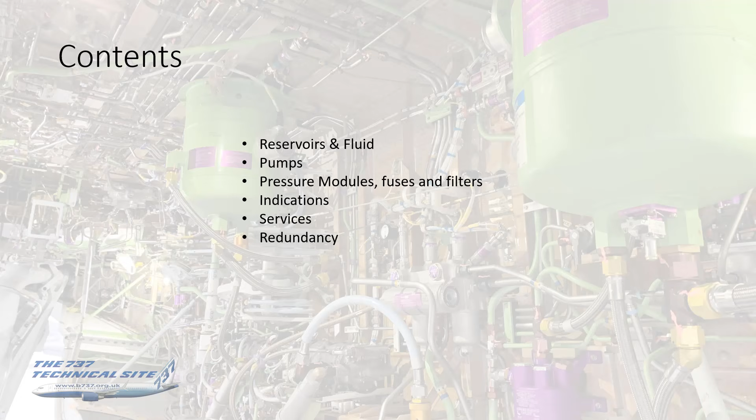In this we'll be covering the reservoirs and their pressurization, the fluid, the pumps, pressure modules, fuses and filters, indications, the services supplied, and redundancy.

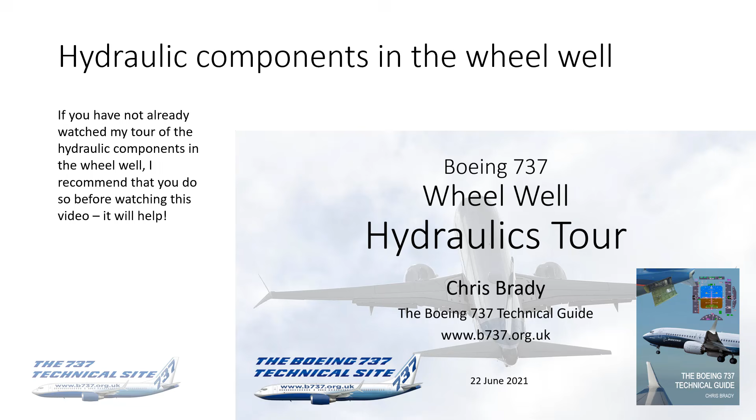A quick word about my previous presentation, the wheel well hydraulics tour. If you haven't already watched this one, I recommend that you do before watching this video. It will help. It's only about a 10-minute video, and it hopefully puts some of the components into context for you, where they are in the wheel well and how they interconnect. I'll be going through all of those components in more detail in this presentation, but think of the hydraulics tour video as a kind of intro or scene setter for the hydraulics visible in the wheel well.

Okay, if you're still with me, one thing I should have mentioned in that wheel well hydraulics tour, but didn't, is that all the hydraulic pipes have got this blue and yellow identification tag. You can see it on the pipe at the front, but there are two behind in shot as well, just out of focus. Now all the pipes will have that. It will help you if you wish to go into the wheel well and see some of these things that I'm mentioning. You can follow the systems through yourself.

Many, but not all of the pipes also have a named label to the right of the identification. So this one in shot here shows B system pressure with a flow arrow to the left of picture. They don't all have that named arrow, but a lot do. So you can go to a random hydraulic pipe, find its label, and it will tell you hopefully what service it supplies, which helps you build up a mental model of where everything is and how it all fits together.

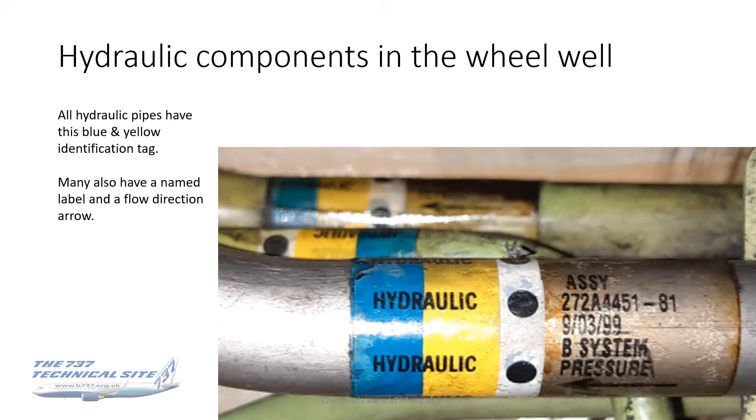Okay, so on with the presentation. Here we have the almost obligatory schematic for a complex system. This is the schematic that I use for hydraulics. You've got one in your FCOMs. The engineers have got several in their maintenance manuals, and they all look different. They're all laid out differently, but of course the functionality of them all is hopefully identical. You just use whichever one you feel comfortable with, either mine or the FCOM one or any others you can see issued by third parties. They all should be the same. It's whichever one sits right with yourself.

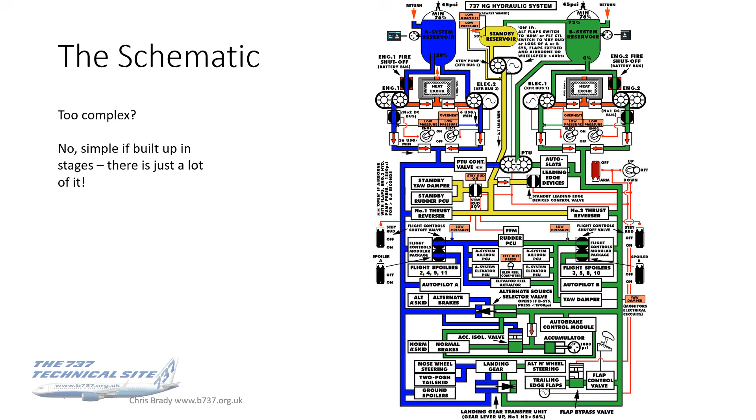The obvious thing to say about this schematic, like probably all of them, is that at first sight it looks very complicated. I can assure you it isn't. It's just that there's a heck of a lot in it, that's all it is. Like all schematics, when you break them down into their individual components, they're actually quite straightforward, and that's what I'll be doing in this presentation, taking you through it step by step so that you can build it up and understand how the hydraulic system fits together.

All right, on with the show. We'll start at the beginning with the reservoirs. There are two main hydraulic reservoirs, A and B, and these are pressurized to around about 47 psi from the pneumatic system. The reason for that is to prevent foaming of the fluid and also ensure that a positive flow of fluid reaches the pumps.

Now, this foaming phenomenon, for those of you that haven't seen it or heard of it before, happens in all liquids when you reduce the pressure, particularly if you reduce the pressure quite quickly. The demo I usually give to guys who aren't familiar with this: if you have a bottle of still water that you might drink in flight, on the ground, make sure the lid's screwed on nice and tightly. You take off, you climb, you get to top of climb, pull out the bottle of water, and open the lid. You will see in that bottle of water lots of little air bubbles form.

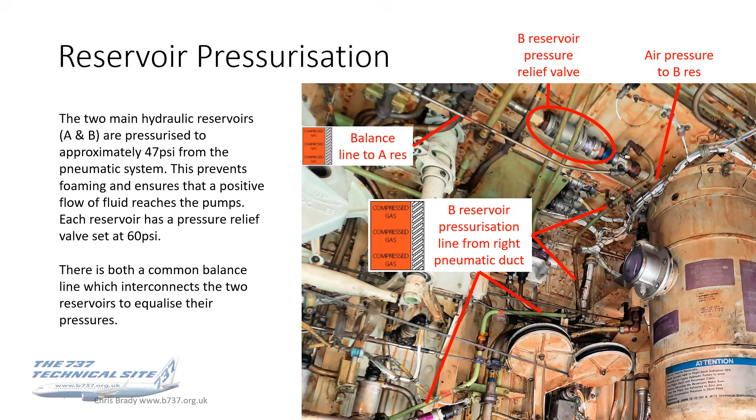There is a vent line that I've already mentioned, from the pressure relief valves between both reservoirs. This takes any overpressure fluid residue across the wheel well ceiling, then down into a drain mast located behind the wheel well. This also prevents fluid backflow into the pneumatic system.

The vent line going across the ceiling of the wheel well is quite easy to spot, because it's a thick pipe, and it's the only diagonal running pipe across there. If you're unsure of this, again refer back to the wheel well video I did.

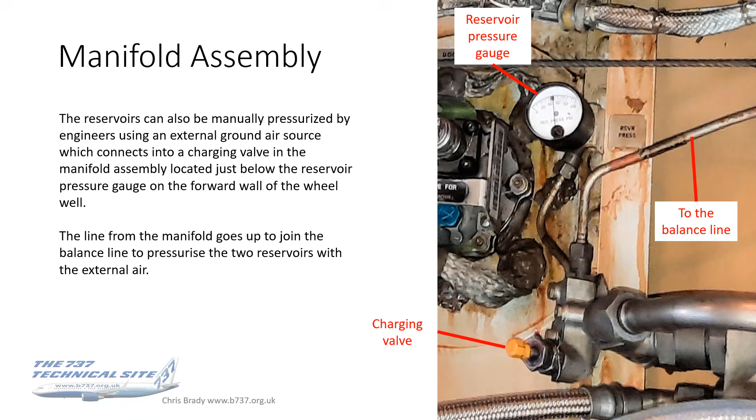Alright, so this is now just a short video of the 737 NG wheel well, showing the reservoir pressurization lines. I include this because the wheel well hydraulic tour I did was actually filmed on a Classic, and these components are different. It's actually the only real difference between the Classics and the NGs hydraulically.

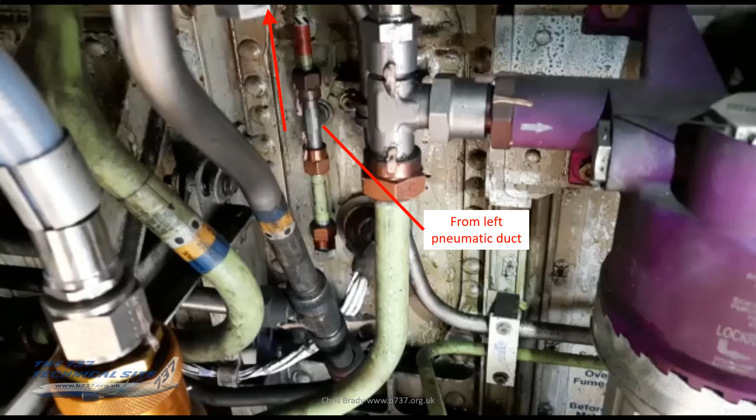It shows the A system reservoir pressurization run from the pneumatic manifold to the reservoir, across the balance line, and then down to the charging valve.

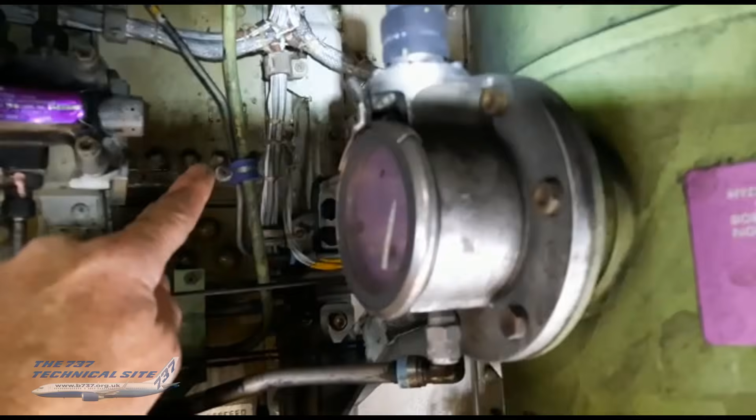On the Classics, where the manifold assembly is on the NG and the Max, they've got this unit called the reservoir pressurization module - so you won't see this on an NG or a Max. This takes the pneumatic sources, left, right duct or external, into a pressurization module, then separates the air for the A and B reservoirs.

That air then goes through two depressurization valves, which are sat on top of the module. They're labelled, and then onto the reservoirs. There's no balance line on the Classics because this unit effectively does the same as what the balance line would.

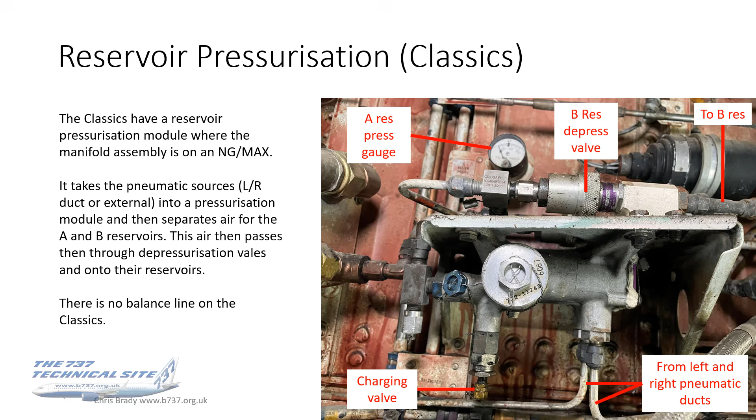Now, if you look in the wheel well, you may see either one or two reservoir pressurization gauges, and that tells you whether the hydraulic reservoir pressurization system has been modified or not.

From 2003, there was a modification available which fixed two problems. The first one was hydraulic vapors getting into the flight deck, caused by hydraulic fluid leaking up the reservoir pressurization line back to the manifold, giving hydraulic fumes in the air conditioning.

The second one was getting a hydraulic pump low pressure light during very long flights in a cold soaked aircraft. This was caused by water vapor condensing in the reservoir pressurization line, which would then freeze during a long flight due to the cold soaking and block the reservoir bleed air supply.

So if you haven't got a reservoir bleed air supply, as we've just seen, you'll get foaming, you won't get the header pressure to the pumps, and you could, in extremis, lose hydraulic pressure. So that's why the mod was done.

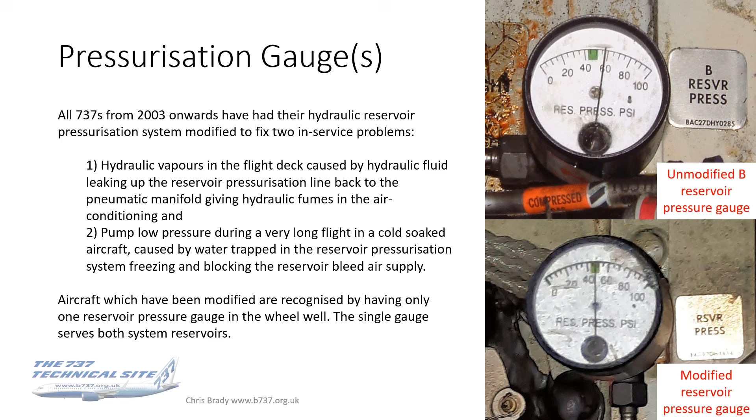Onto the reservoir itself. This particular one is the A system reservoir, and this photo was actually taken on a Max, so it's got the nice shiny new green reservoir there.

Working from the top to the bottom, the green pipe running across is your vent line to the drain mast, the one that runs diagonally across the ceiling of the wheel well. Below that, we've got the balance line going across to the B reservoir, and below that in green you've got the pressurization line coming up from the left pneumatic manifold.

On the side of the reservoir, you've got the quantity gauge and a transmitter which goes to us in the flight deck, giving us our hydraulic quantity. The reservoir itself, 21.6 liters is the full level.

The actual capacity of it is slightly greater than that because obviously it's not entirely filled with fluid, so you've got the air pressure at the top. It's 2/3 of the size of the B system reservoir.

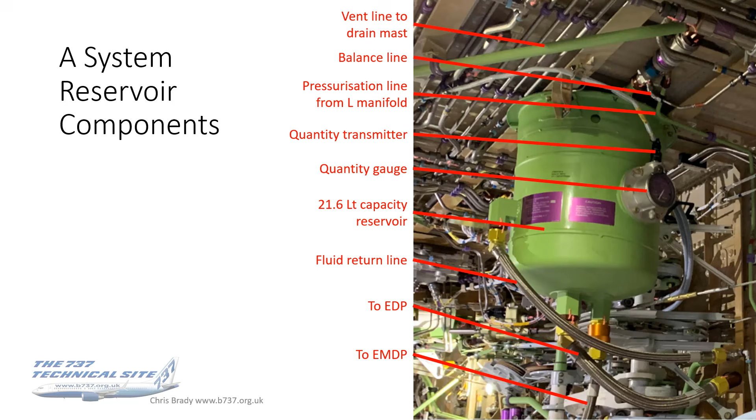Coming out to the bottom, you've got two pipes there, one to each pump, the engine pump and the electric pump, and above it, the silver braided pipe going into the side of the reservoir - that's your fluid return line. So that's where the fluid, after it's been round the aircraft services, comes back and is put back into the reservoir.

The B system reservoir is very similar. This one's in white, so it's an NG. At the top again, you've got the line from the right pneumatic manifold. You've got the reservoir pressurization and vent line just about visible above the reservoir itself.

Again, you've got the gauge and the transmitter. The first pipe going into the reservoir on the left-hand side, the upper one with the red elbow, that's refill fluid from the standby reservoir. The hydraulic fluid is actually replenished for the B system through the standby reservoir, and that's the interconnecting balance line between the two.

The B system's capacity is 31.1 liters, which is half as big again as the A system. The fluid return line is the next one down, with the gold coloured fitting at the top of it, and at the bottom, unlike the A system, you've got three pipes coming out of it, the extra one being for the PTU.

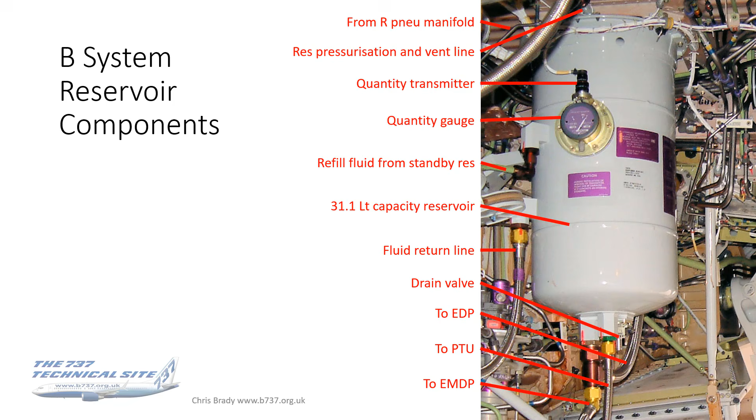On the originals, for anybody still flying them, and by originals I mean the 1 and 200 series, the B system reservoir was very small. It was actually just under 6 litres, so that's about a sixth of the size of the current B reservoir on the NG and the Max.

On the originals, the A system was used both for the flaps and the landing gear, so B was effectively just a backup hydraulic system for the other services. A was the one that was the major system.

The standby reservoir - this is a photo of the unit on the NG and the Max. Differences between the other ones is it's kept full, absolutely full of fluid, so it doesn't contain any air, so it doesn't need pneumatically pressurizing, which keeps the system quite simple.

The fluid is kept pressurized by a fluid filled balance line to the B system, which I mentioned in the previous slide. So going through the components on this, from top to bottom, you've got a low quantity switch on the very top that comes on at 50%.

The balance line is there from the top, but goes to the B reservoir. The capacity of this reservoir is just over 13 litres. The fluid is refilled on the line which goes into the center of it, on the right of the picture. Output of fluid is the large braided line down at the bottom, and fluid is returned along that thin green line which goes back in on the other side, which you can't see in this photo.

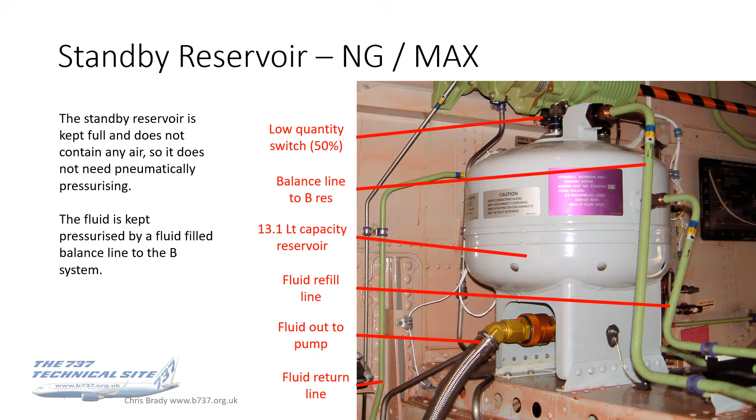But you can see it in this photo. This is a photo of the standby reservoir on the classics. All the components are the same as the NG and the Max. Just on this photo, you can see the fluid return line because it goes in at the back. The real difference between the classics and the NG, apart from the shape, is that the capacity is actually the same, to within a few mil.

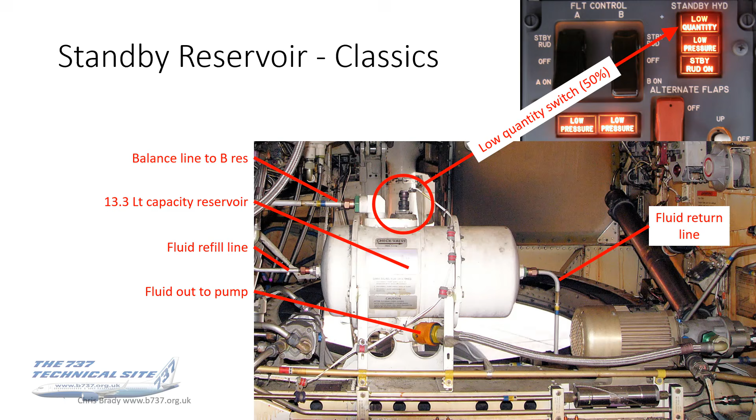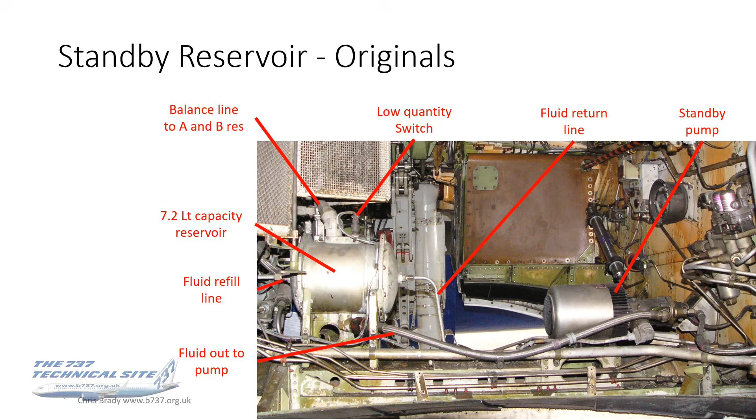The difference is the standby hydraulic pump is in the wheel well here on the classics, whereas on the NG and the Max it's moved out. On the originals, the standby reservoir is smaller again at 7.2 litres, so it's around about half the capacity of the reservoirs on the classics onwards. But again, all the components there are absolutely the same as they are even on the Max today.

Servicing of the reservoirs.

The hydraulic fluid is replenished with this sort of wand and hand pump arrangement, which you can see in the right hand wheel well. If you just look over the lip of where the wheel goes, you'll see it down there. The hand pump's that white handle that's bracketed into the full bulkhead. If you look above that, you'll see a 3-position switch, or selector switch, for either A, B, or closed. Remembering that B actually replenishes the standby reservoir and then sends the fluid onto the B reservoir.

For those that are interested, the official specification of the hydraulic fluid is a fire-resistant version known as BMS 3-11 Type 4. Common brand name for this is Skydrol, and that's usually what it's referred to as. Other brands are available, and this stuff isn't cheap. I googled it just before I did this presentation just to get an idea of price, and it's about $1,000 for a case of 24 quarts. So not cheap stuff.

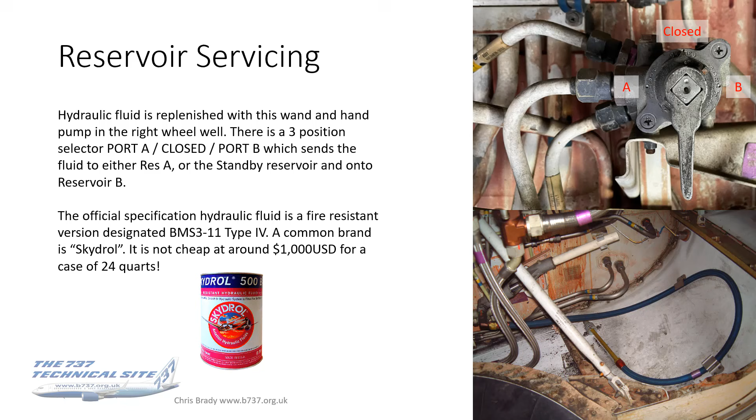Alright, so inside the reservoirs you've got standpipes. Now this data is only applicable for the NG and the Max. On the classics, the standpipes are a slightly different height and arrangement, so this information is just for the NG and the Max. The A system's got a standpipe on the engine-driven pump line.

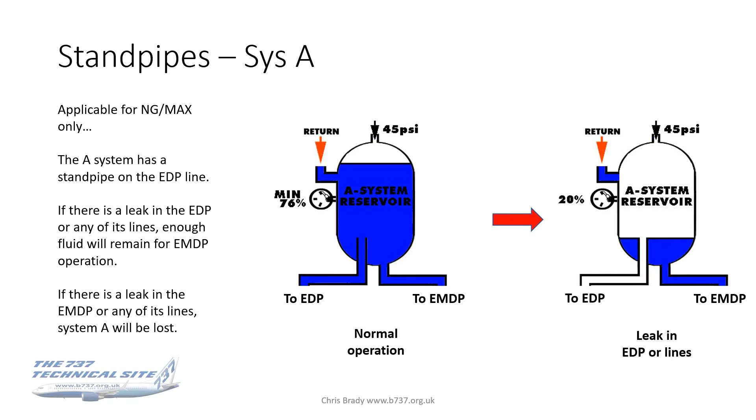If you get a leak in that engine-driven pump or any of its lines, the fluid will drain away, but only to the level of that EDP standpipe. So that will leave enough fluid for continued operation of the electric pump. Now, if there's a leak in the electric pump or any of its lines, then you just lose a system's fluid. There's no reason for a second standpipe at all.

The B system, and again this is only applicable for the NG and the Max, has got a much shorter standpipe because it only needs to be shorter, because the only system this could feed in the event of a leak would be the PTU. That's because the engine-driven pump and the electric pump are on the same feed from the reservoir. So if there's a leak in either the engine or electric-driven pumps or any of their lines, the quantity will disappear away to indicate 0. Now, although it's indicating 0, there is enough fluid for PTU operation.

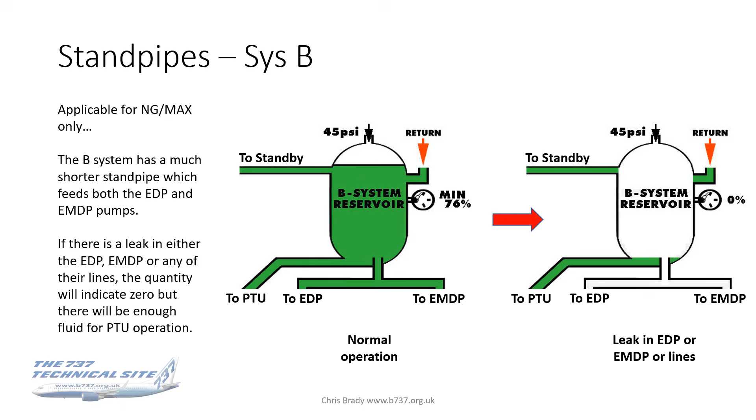So it's not really 0, but that's the indications we get in the flight deck. The standby system, and this is applicable for all generations of 737, the standby reservoir doesn't have a standpipe. If there's any leak in the standby pump or any of its lines, the standby system will be lost. Now, the manuals say that although the standby reservoir is connected to the B system reservoir, a leak in the B system will not affect operation of the standby system, which is comforting to know. And just a reminder, the low quantity light, which is on the flight controls panel, that will illuminate at 50%.

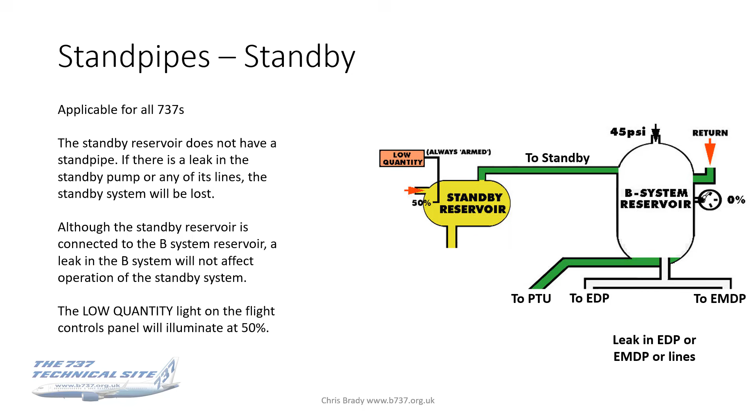So to summarize all of that: on the A system, there are separate standpipes for the engine pump and electric pump. A leak in the engine-driven pump or any of its lines will leave enough for the electric pump operation. For the standby system, a leak in the B will not affect operation of the standby system. And on the B reservoir, you've got a direct feed to the PTU. There's a combined standpipe for the engine and electric pumps, which is a difference from the classics, but it's still enough for PTU operation.

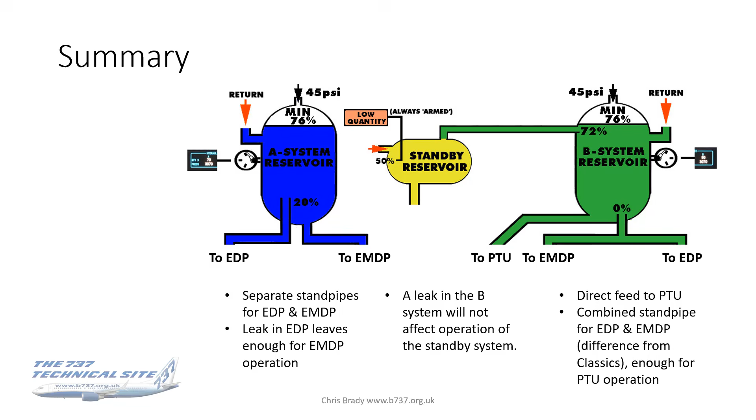How you'd use this, I guess, is if you're in a 737 NG and you notice the A system quantity dropped to 20%, then you can suspect a leak in the engine-driven pump or its lines. What you choose to do with that information is up to you, but it's all good background knowledge.

All right, that's enough of the reservoirs and the fluids. Let's go on to pumps now. I'll just start briefly with the originals.

I realize there are very few people watching this who fly them, but just for a kind of historical perspective, and to help show you the derivation of where we got the present arrangement today. The originals had System A, which remember was the primary system, powered by the two engine-driven pumps.

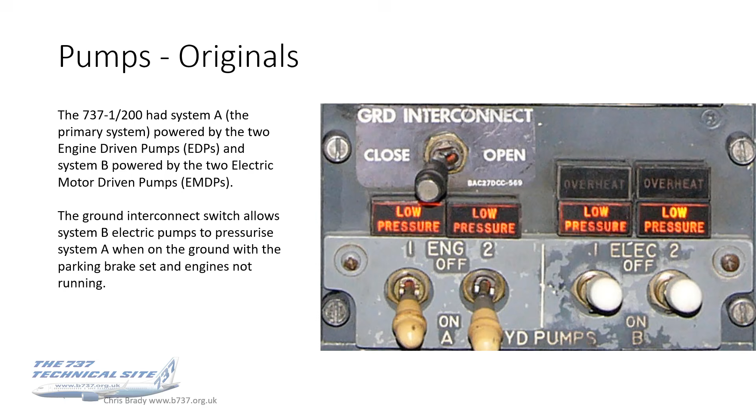Okay, so back into the present day. From the 737-300 onwards, each hydraulic system has got both an engine and an electric pump, powered from the opposite side, either gen bus on the classics or the transfer bus on the NG and the Max. This is for greater redundancy in the event of an engine or generator failure.

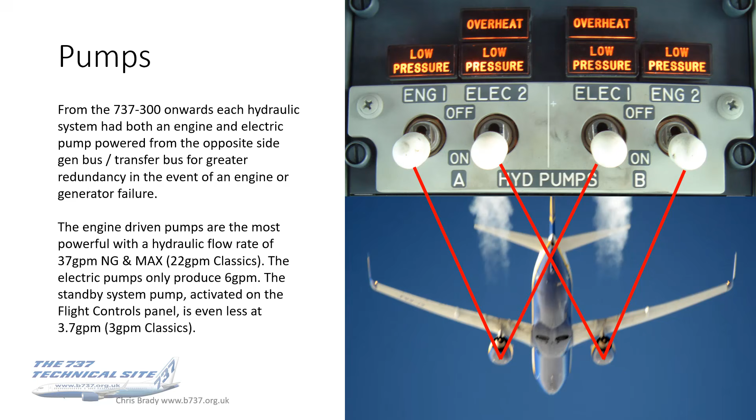The engine-driven pumps are by far and away the most powerful. They've got a hydraulic flow rate of 37 gallons per minute, or 22 gallons per minute on the classics, whereas the electric pumps only produce 6 gallons per minute. So the engine-driven pumps are 6 times more powerful. The standby pump, activated from the flight controls panel, is even less at 3.7 gallons per minute, but then again, it has a lot less to do.

Now we know there's an on-off switch, but that is actually something of a misnomer. When you switch an engine-driven pump off, the pump actually remains running. What you're doing by moving the switch to off is energizing a solenoid operated blocking valve that blocks the pump output, so there's no output from the pump. The hydraulic fluid still flows around the pump case, but that's for cooling, because the thing's still turning. But you cannot physically switch this pump off, which you may need to bear in mind, and I'll come on to why later.

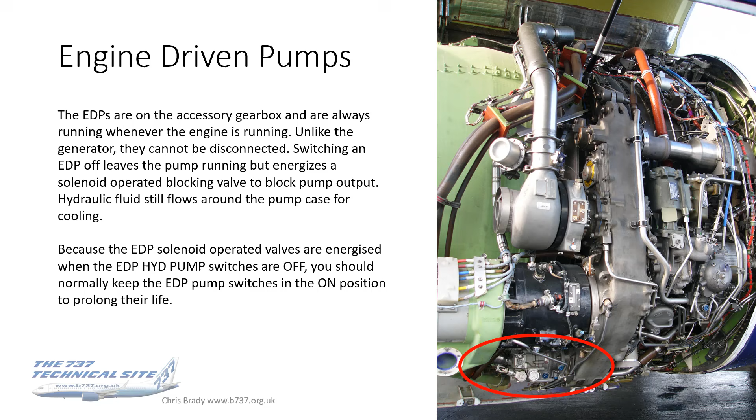So this is partly why it's important to pull a fire switch as directed by the QRH, of course, if you have engine damage.

Pulling the fire switch stops fluid flow out to that engine-driven pump. Remember, that pump cannot be switched off - it'll always keep turning, and if there's damage in there, it could be indefinitely leaking your hydraulic fluid out, which you might need for other services. So if you pull this fire switch as directed by the QRH, it will hopefully stop the hemorrhaging of fluid from the pump or the vicinity of the engine.

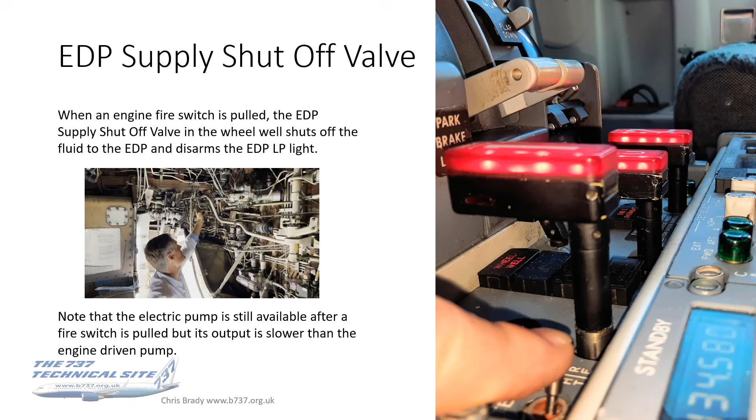When you do this, it's worth noting that the electric pump is still available after a fire switch is pulled, so you haven't necessarily lost the A or B system, depending which side it was that you pulled. But of course, the output is going to be much slower than the engine-driven pump.

Okay, let's look now at the electric motor driven pumps - these are located in the forward wall of the wheel well near the reservoirs. Next time you're on your walk around, you can go in and have a look at these. They're there on display for you.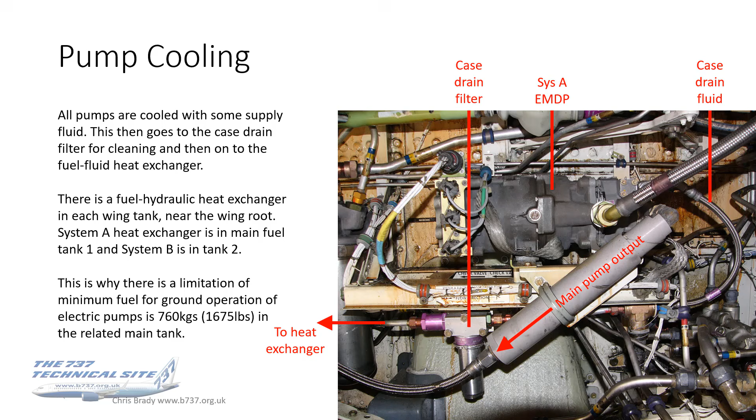There is a limitation of minimum fuel for ground operation of the electric pumps of 760 kilos in the related tank, and this heat exchanger is the reason for that limitation. It's only there for the electric pumps - it's not there for the engine-driven pumps, because they don't get as hot since they don't have the electric motor. The case drain fluid from the engine pumps does also go through the heat exchanger, but the limitation on minimum fuel isn't there.

So talking of heat, let's look at the pump overheat and where this comes about. If an overheat is detected in either the electric pump itself or the electric pump case drain fluid, the overheat light will illuminate, and the trigger temperature for that is around about 110 centigrade. Now this light will extinguish again if it cools below 85 C.

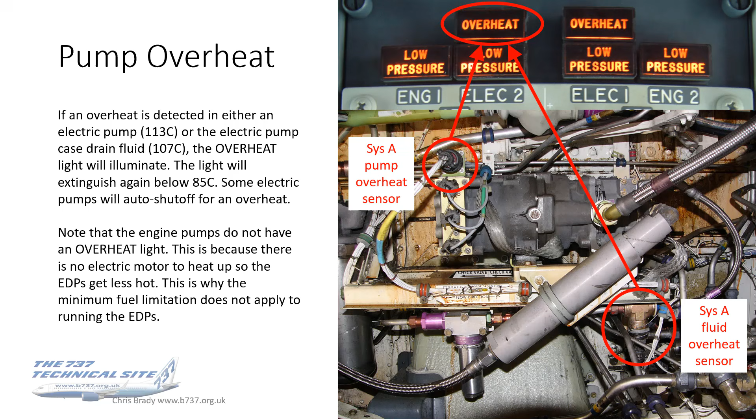Some electric pumps will auto shut off for an overheat, so check your FCOMs for which version you've got - most of them don't actually, most you have to go into the QRH and manually switch off the electric pumps. You can see on the photo the two pickup points for the overheat sensors there. Again, I make the point that the engine pumps don't have an overheat light - that's because there's no electric motor on them to heat up, so they get less hot. This is also why the minimum fuel limitation doesn't apply to running the engine-driven pumps.

Okay, for the standby pump, as we've already mentioned, on the originals and the classics it's there on the keel beam. Again, like the other pumps, it's cooled by case drain fluid, which is then filtered, but then returned directly to the reservoir, so it doesn't go through the heat exchanger. You can see level - the large part of this pump is actually the motor.

It's the motor that drives the pump. The pump is the small part on the right hand side. Supply fluid going in there on the braided line.

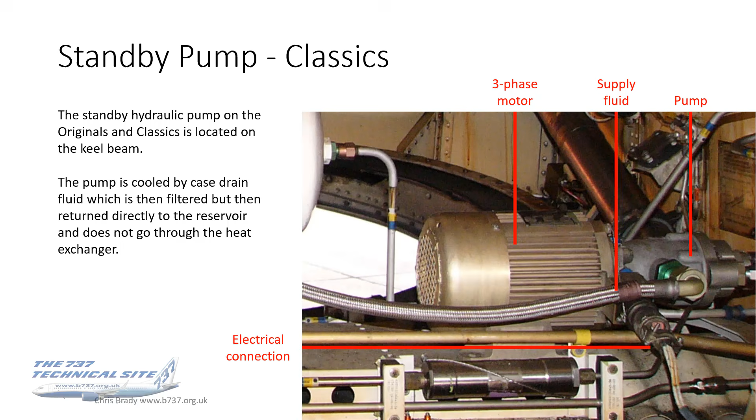On the NG and the Max, you won't find the standby hydraulic pump in the wheel well. It's been moved out onto the right aft wing body fairing behind the bulkhead. Also the brake accumulator has as well.

I've never had a straight answer why this was done. I suspect it was because the landing gear was lengthened for the NG, and as a result the space on the keel beam got a bit tight, so the pump moved. It could also be to stop any secondary damage from, say, a tyre burst affecting the standby system. I don't know. Either reason is valid. They had that empty space there in the wing body fairing, and in my opinion this is a big improvement to use it and put these critical components here.

The only difference between this pump and the pump that was on the keel beam in the classics is that red horn on the far end of it, and that's a cooling air duct, because obviously there's less airflow in here than there would be in the wheel well.

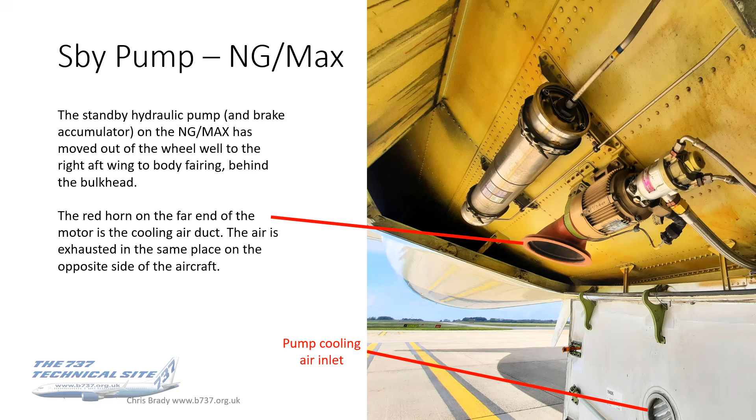So the air comes in through that air inlet on the door. You can just see that grill at the bottom into there, cools the motor, and then the air is exhausted in the same place on the opposite side of the aircraft. So on the left aft wing body fairing, you will see another sort of hole, and you may wonder what it's for. Well, now you know. It's the exhaust for this cooling.

All right, so standby pump control. Let's take a look at that. The standby hydraulic pump can be activated in a number of ways, but manually we can activate it by moving either of the flight control switches to the standby rudder position, or by moving the alternate flap switch to arm. So any of those three switches will start the standby hydraulic pump.

You can do this safely on the ground, as long as there's no wire locking on your alternate flap switch, and certainly on the classics you can hear the pump run. On the NGs and Max it's more difficult to hear it because it's further aft and outside of the aircraft.

The standby pump will also activate automatically through either the auto standby system, which I'll cover later, or the main rudder PCU force fight monitor, and I'll cover that on the flight controls videos.

When the pump is activated for the first time in a while, so several hours have passed since it's been activated, the low pressure light will illuminate for a second while the pump charges, and then that light will extinguish. So that's a little confidence check for you that the pump's actually running.

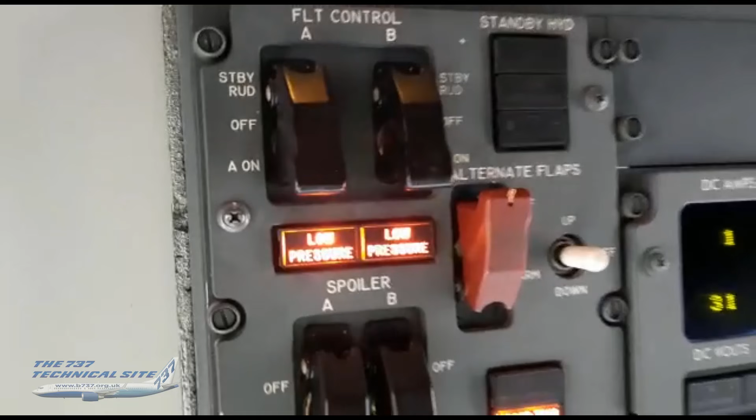Okay, so this is just a video demonstration of the alternate flap switch to arm and the flight control switch to standby rudder. I'm going to start with the alternate flap switch first. Just open the red guard, nothing happens.

Move the switch to arm. Notice the low pressure light illuminates. This is just for a fraction of a second. I've paused the video here so you can see it. That's the proof that the standby hydraulic pump is energized. So the motor's got electric power and the pump has just primed itself, and when it's primed that light will extinguish.

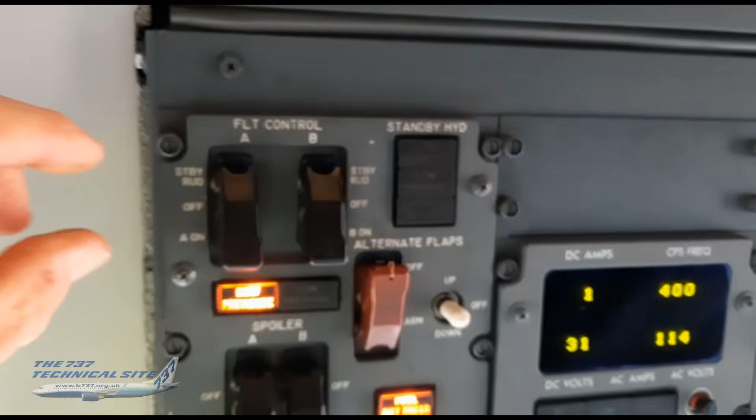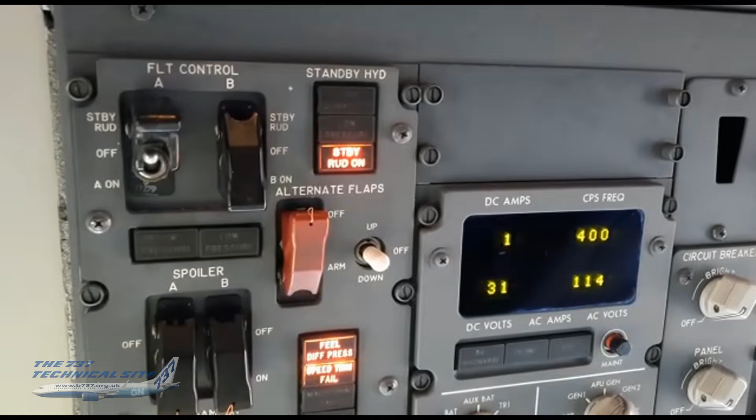So we can continue here and just close the guarded switch, go to the flight controls now, and I've got the A system off and the B system on. That's why the low pressure light's on the A system. Through to standby rudder, the light comes on, and the flight controls low pressure light goes off.

Switch it off and it's back to normal. With the B system, through to standby rudder, again low pressure light is off as you would expect, and the standby rudder light comes on.

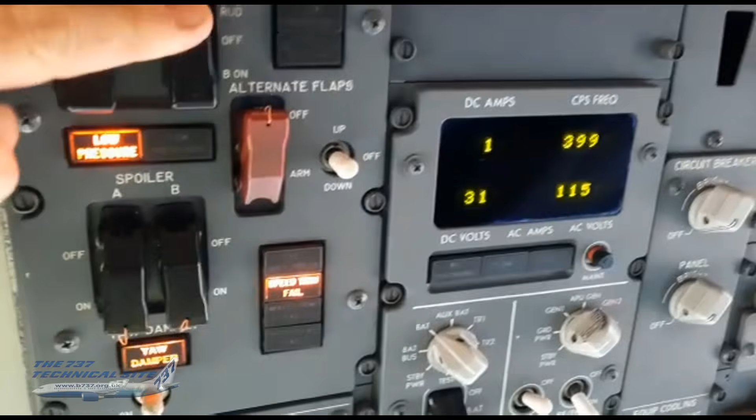That's it. So in summary, the engine-driven pump has got 6 times the output of the electric pump, so it's a much stronger pump. Pulling the fire switch will only shut off fluid to the engine-driven pump. The engine-driven pump cannot be switched off. And the electrical source for the electric pump is from the opposite side.

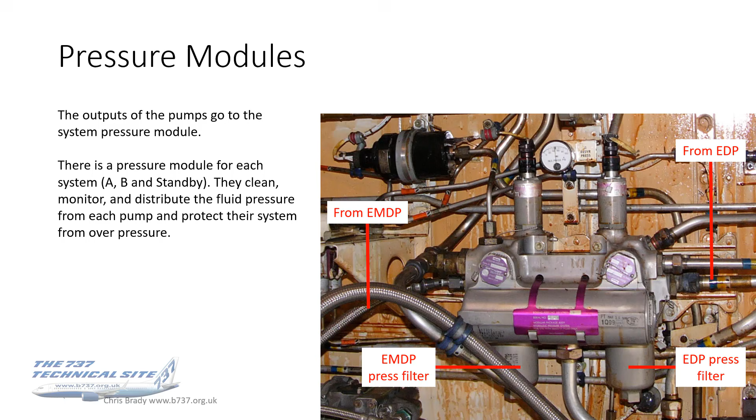You can see the pressure filters at the bottom, and up at the top is where the pressure is sensed from each pressure module, sent to us in the flight deck for triggers for low pressure warnings, or further up and to the left there, the actual pressure sender for the hydraulic pressure.

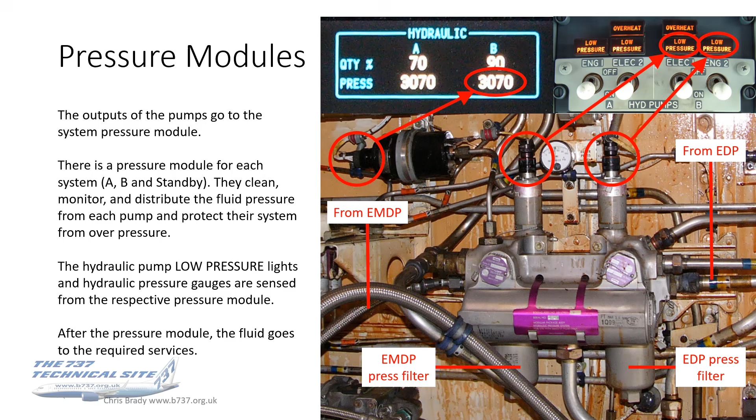After the pressure module, the fluid goes out to the required services, and you can see pipes coming out of the left and right hand side of this, which go off to the various services.

Now, on the way to the services, there are hydraulic fuses, and you can see these in the wheel well. If you're not familiar with the concept, we're probably all familiar with an electrical fuse - if there's too much current, the fuse burns out and stops the current flow. A hydraulic fuse does exactly the same thing.

So they're basically spring-loaded shuttle valves, and these will close the hydraulic line if they detect a sudden increase in flow, which you would get from a burst pipe or similar downstream. In closing, it preserves the hydraulic fluid for the rest of the services.

There are hydraulic fuses fitted to the brake system, shown here just because they're the easiest to see in photograph. The leading edge flaps and slats extend and retract lines have all got them. Nose gear extend and retract lines, and the thrust reverser pressure and return lines - all of those services have hydraulic fuses on them, so if there's any damage either to the component or a burst in the pipe, you don't lose the whole system pressure.

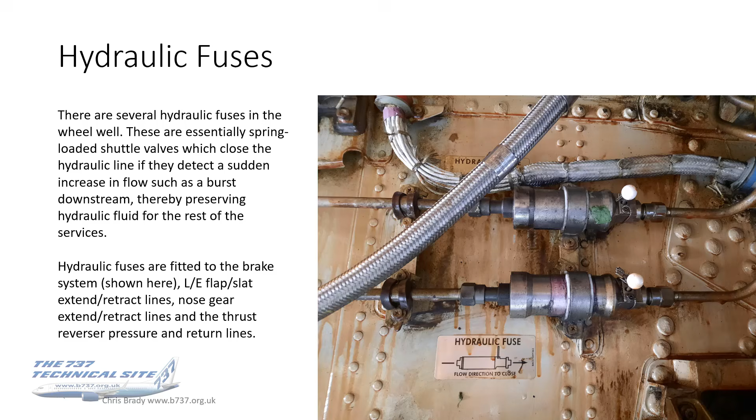When the hydraulic fluid returns from the services, or the heat exchanger, if it's case drain fluid, it goes through the return filter for cleaning before going back into the reservoir.

If the filter clogs, then a red differential pressure indicator will pop up, and you can see I've indicated where it is on the filter there. If the pressure differential goes above 65 psi, the indicator will pop up. If it increases further to 100 psi, then a bypass valve opens and the fluid is allowed to go directly back into the reservoir, on the basis that even contaminated fluid is better than none, at the cost of keeping your hydraulic system clean.

On the photograph, you can see I've labelled the various parts. The bulk of this is at the bottom, the filter housing, and there's a clip just above it, a wire locked clip, so you can change that filter. The wire lockings have become more and more intricate over the years, as a few of these have worn loose and been the source of loss of hydraulic fluid in flight.

The return flow goes in on the left, so that's where the fluid comes in from the services. It then passes around the outside of the case, is squeezed in through the filter, and then passes up through the middle and back out for return to the reservoir. The heat exchanger fluid actually goes into the top, but doesn't go through the filter, surprisingly, even though it joins the filter cap - it just goes straight to the reservoir.

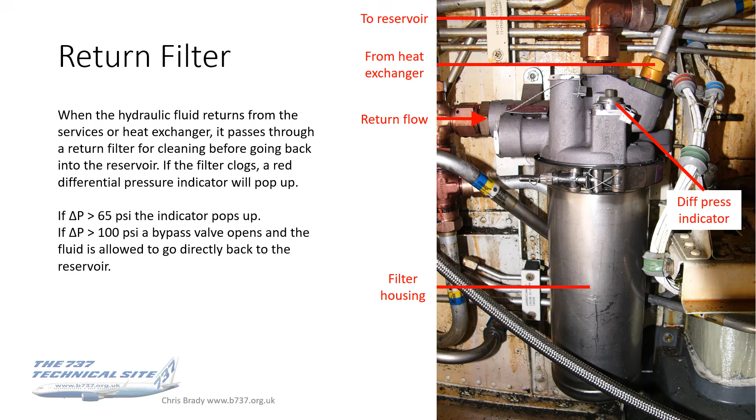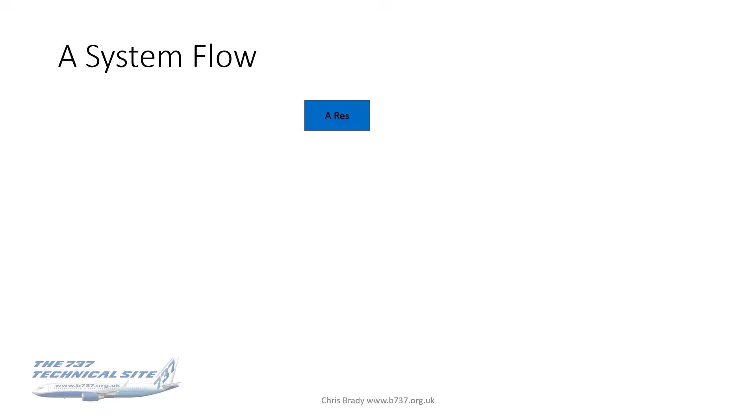Alright, so let's recap what we've done with all of those components and have a look at the flow, the hydraulic flow in the A system. It all starts with the reservoir, which is pressurized from the left pneumatic duct - the A system's from the left, the B is from the right pneumatic duct - and the reservoir can be refilled with hydraulic fluid.

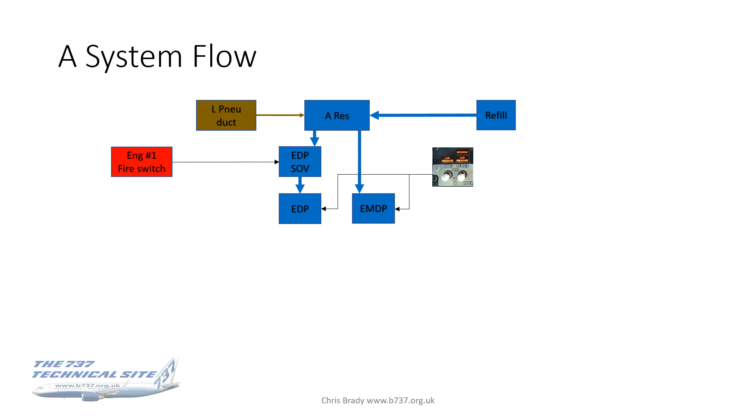From the reservoir there are two outputs, one to each pump. The engine driven pump has a shut-off valve in between, which is operated by the engine number 1 fire switch. From the pumps, which are operated on the hydraulic panel, their output goes to the pressure module. The pressure module gives us information about the hydraulic pressure and will also trigger the low pressure lights.

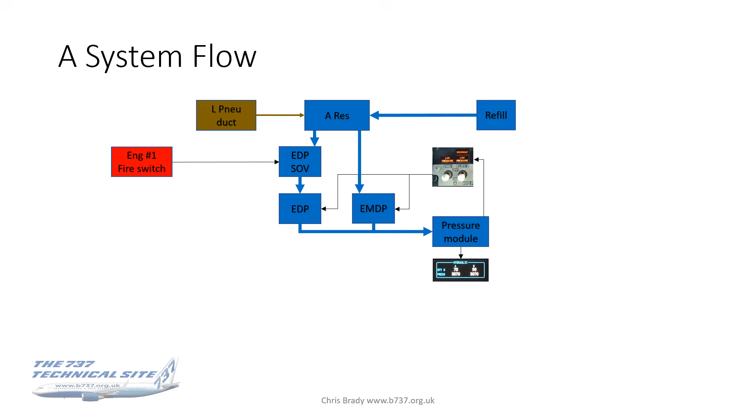From the pressure module it goes to the services, and that's a list of services from the A system. Obviously in the B system that list would be different. After the services, the fluid goes back to the return filter, which we've just been looking at, for filtration and cleaning, and then is returned back to the A system reservoir.

Now you recall that some of the fluid for the pumps is used for cooling. That goes away to the case drain filters - small filters that you can see in the wheel well, just below the electric pump. The electric one's got an overheat sensor, which will also trigger the overheat light. From the filters they go to the heat exchanger, in this case the number 1 main tank, and then back into the reservoir. So that's the flow of hydraulic fluid.

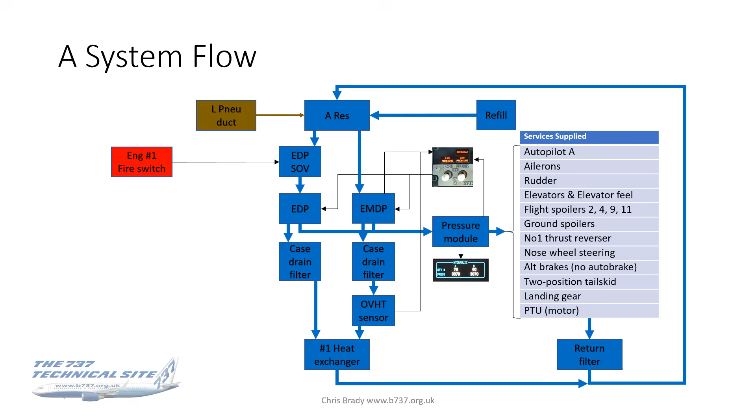The B system is very similar. The main difference is that it's got the PTU addition, so there's an extra pipe coming out of the bottom of the B reservoir, which goes to the PTU pump. The PTU pump is driven by a motor which is driven by the A system. The pump gives added pressure for the leading edge flaps and slats and auto slats.

That fluid is then returned to the case drain filter and overheat sensor for the electric pump. So if by any chance the PTU pump were to overheat, that would show itself as an overheat light on the B system pump. The only other difference is refills through the standby reservoir, and of course the services are a different list of services supplied.

Alright, so let's have a look at the indications that we get in the flight deck and how they've changed over the years. Going right back to the originals again, just for a historical record, to show you the derivation, and for those of us flying the NG or the Max, how lucky we are for having our nice ergonomic displays. In the originals there is only a quantity gauge for system A, and that's because A, if you recall, is the primary system.

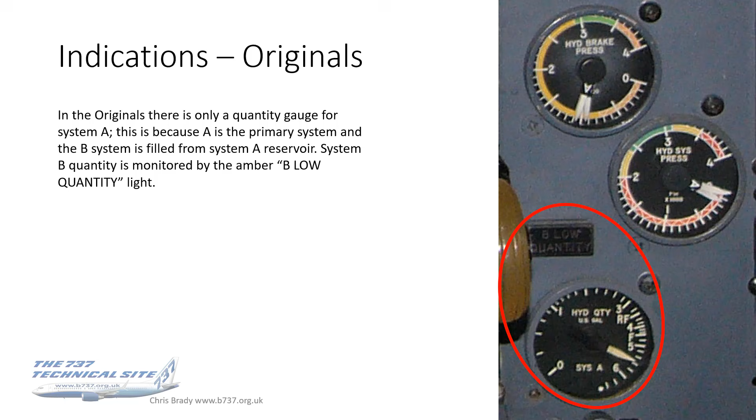The B system is filled from the A system reservoir, so system B quantity is monitored by an amber B low quantity light. The hydraulic system pressures are shown on one gauge with two needles, the A needle, as you can see, being at the front. And the hydraulic brake pressure gauge has also got two needles.

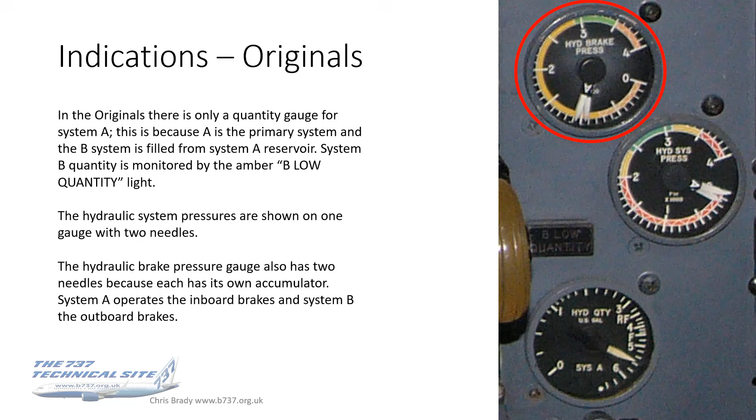That's because on the originals, if you remember back to the landing gear module that I did, it's got two accumulators. System A does the inboard brakes and System B does the outboard brakes.

Fast forwarding slightly to the early classics - these are the pre-EIS ones, built between 84 and 88. The B system on the classics now operates the trailing edge flaps. On the originals, the A system did both the flaps and the landing gear, but they've balanced the loads out now on the classics, and the B does the flaps. So by way of promotion, it's now got its own quantity gauge, and the markings are a lot more simplified than they were on the originals.

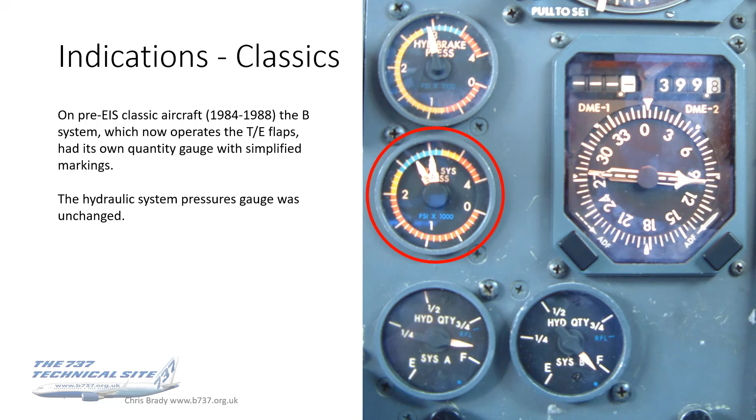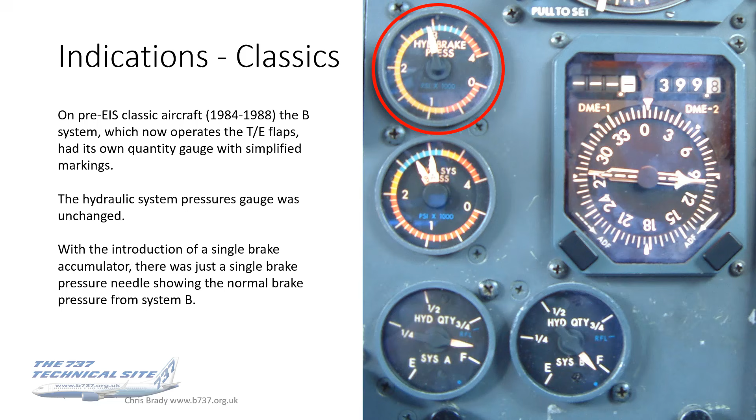The hydraulic system pressure gauge is unchanged - still one gauge and two needles. The brake pressure gauge has changed because there's now only one brake accumulator, so it only needs to show one needle. That's showing the brake pressure from System B.

Nowadays we've got this. The NG display is above, that's on the lower DU, and on the max it's on the MDS, and it's very, very simple. It just shows quantity and pressure for A and B system. It's just a digit. If either system needs refilling, you'll get a white RF caption next to the quantity.

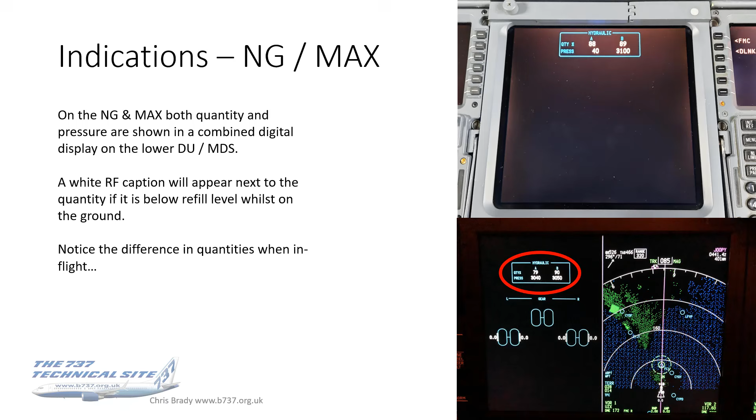Notice the difference in quantities on the in-flight readings there on this max display. That's actually normal, and let me say a little bit more about that.

So the tendency could be for crew to report this, say, I'm below my minimum hydraulic quantity for dispatch. Get an engineer, he tops up the hydraulics, and next thing you've overfilled it as it warms up. But anyway, engineers should be aware of this.

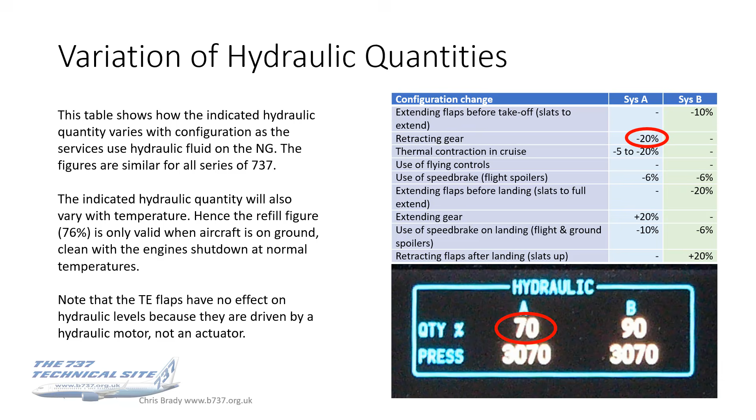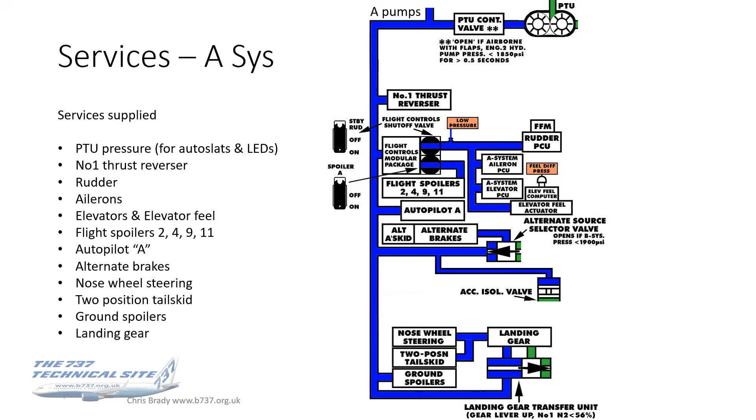All right, so on to services. For the A system, the services look like this. Top to bottom, you've got the PTU control valve and pressure for the PTU, which serves both the autoslat and leading edge devices. You've got number one thrust reverser, rudder ailerons, elevator and elevator feel, half the flight spoilers, autopilot A, alternate brakes, nose wheel steering, two-position tail skid if fitted, ground spoilers and landing gear. So quite a list.

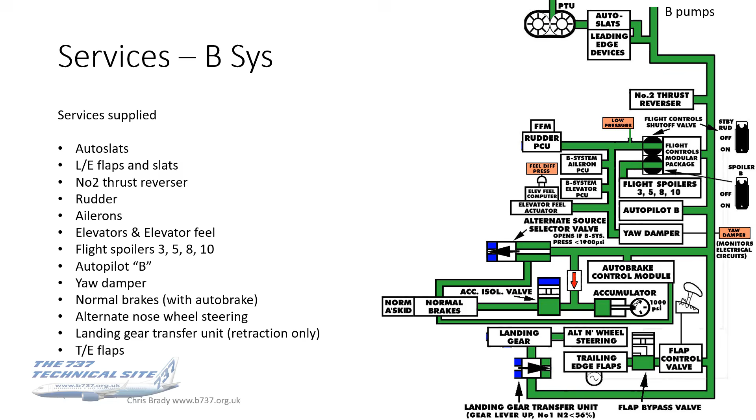B system, a similarly long list. I think the significant thing here is the trailing edge flaps, which are on there. Well, this is a list, you can read at your leisure. It's in the FCOMs, so it's all there on the schematic.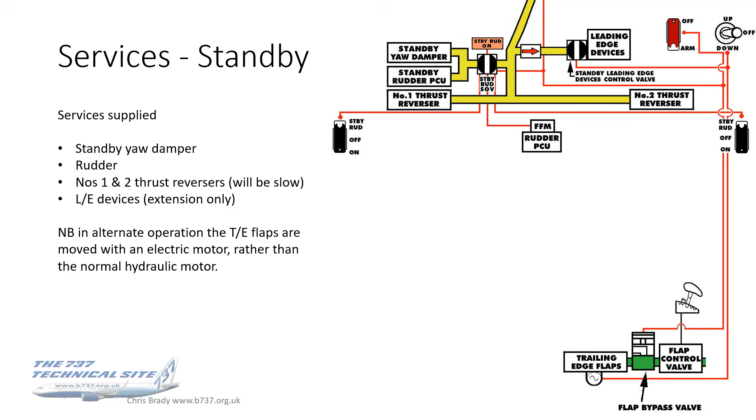Now, while we're covering this, and I'm aware we're getting slightly off topic of hydraulics, but just for the sake of completeness, I'll mention that in alternate operation, the trailing edge flaps are moved with an electric motor rather than the normal hydraulic motor. And again, you can see that on the rear wall of the wheel well. But more of that in the flight controls video.

All right, so a word about auto standby operation. We already know that we can activate the standby hydraulic pump with either flight control switches or the alternate flap switch by moving that to arm. But there's an auto standby facility as well.

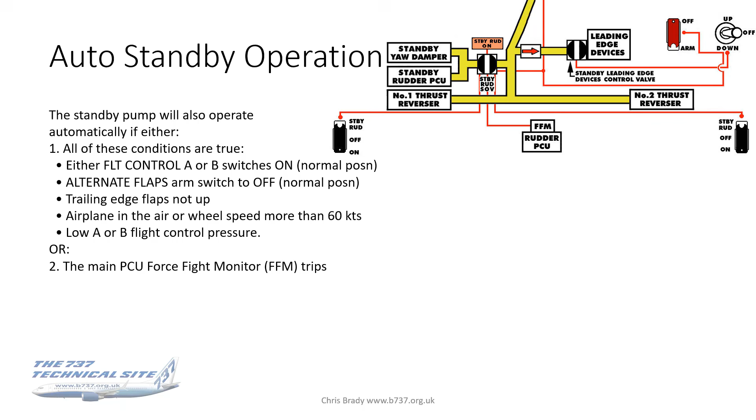So it will operate automatically if either, and all of these conditions must be true: flight control A or B switches are on, so they're in the normal position; the alternate flap switch is off, again that's in its normal position; trailing edge flaps are not up, so in other words you've got some flaps; the aircraft's in the air, wheel speed more than 60 knots, and you've got a low A or B flight control pressure, or the main PCU force fight monitor trips. So that's auto standby operation.

What it does is it activates the standby pump, it opens the rudder shut-off valve, it allows the standby system to power the rudder and the thrust reverser, and it brings on the standby rudder light. So the only thing it doesn't do on the standby system is the leading edge devices, because it has no effect over the standby leading edge device control valve. That is purely the domain of the alternate flap switch.

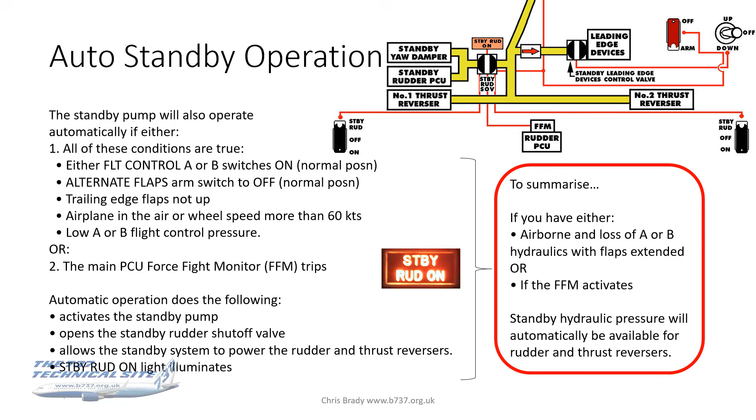So, summarising all that, because that's quite a lot of information - in plain English, if you're either airborne and you lose A or B hydraulics with some flaps, or the FFM activates, standby hydraulic pressure will automatically become available for the rudder and the thrust reversers. There you go. That's all you need to know.

Right, redundancy. Let's have a look at that. So, putting together the A, B, and standby services, you get a picture like that. Now, again, I'm not going to go through this in minute detail. It's there for you to look at. If you want to study it, then just pause the video.

But what I am going to say is, if you look at this, you'll see that most services have either got two hydraulic supplies, like the rudder PCU, the ailerons, the elevators, the elevator feel, the landing gear, even the autoslats and leading edge devices with the PTU, or they've got an alternate system. And an alternate system could be things like alternate brakes, or another autopilot, alternate nose wheel steering. So the level of redundancy here is very, very high.

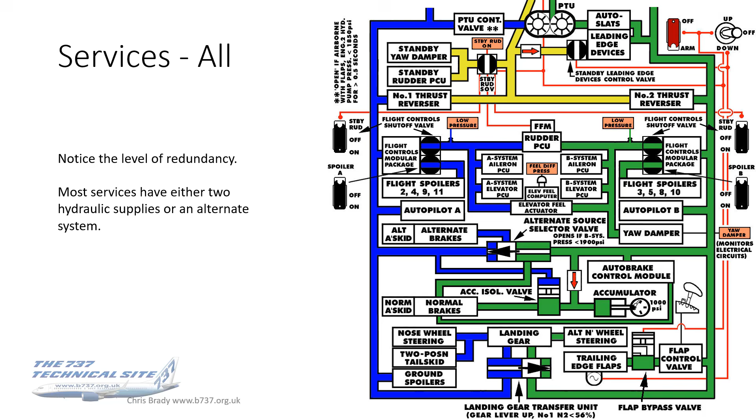So, of significance, you've got no autoland because you've only got one autopilot. But you know, big deal. I mean, we probably only need autoland about 1 in every 100 flights. Roll rate and speed brake effectiveness is reduced slightly. Now, I've flown the aircraft with only half the hydraulics, and I promise you, you won't notice it, or you won't easily notice it. It's not going to be a big issue.

Next item, manual gear extension needed, retraction not possible. This is the biggie. This is the only item of any real significance in my book with loss of System A. Not only do you have to do a manual gear extension and give yourself time to do that, retraction is not possible. So you have to seriously think about where you're going and your plan B if you don't get into that airfield, because diversion fuel will be an issue with the gear down.

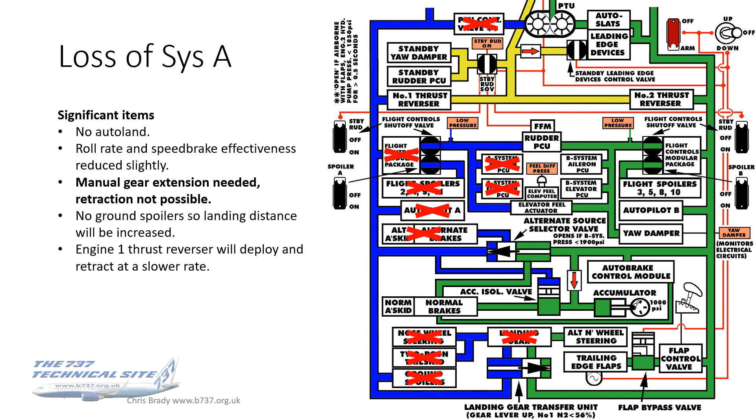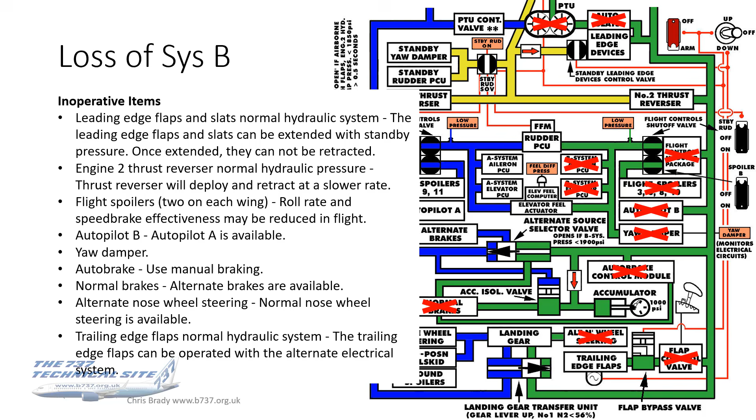Loss of System B, that's what it looks like. That's the list of in-op items as taken from the QRH. Again, go through that at your leisure. Pause the video if you need to. But what I'm going to do now is I'm just going to boil that down to the significant items.

So, again, no autoland. Roll rate and speed brake effectiveness reduced slightly. Who cares? No yaw damper. Again, this is something you probably will not notice.

I mean, I've flown the 737 many times on revenue flights with no yaw damper, and you might just get one of the cabin crew at the back calling up, feeling a little bit queasy because of a little bit of wobbling, particularly in the long body aircraft, the 800s and 900s. But really, it's hardly noticeable.

On air test, one of the things we do is we switch off the yaw damper and put in a rudder doublet to just set up an oscillation, and the aircraft will stabilize within one oscillation when you switch the yaw damper on. Now, out of interest and curiosity, I left it without switching the yaw damper on once, just to see how many cycles it would take, and it was about 3 or 4. It's incredibly directionally stable, the 737.

It will damp itself out very, very nicely. So the bottom line is, you will hardly notice there being no yaw damper. The biggie is the trailing edge flaps. You will have to extend the trailing edge flaps with the alternate electrical system, and for that reason, you should, as directed by the QRH, do a flap 15 landing, and that's because for the go around, if you've got any more than flap 15, your go around climb performance will be severely compromised.

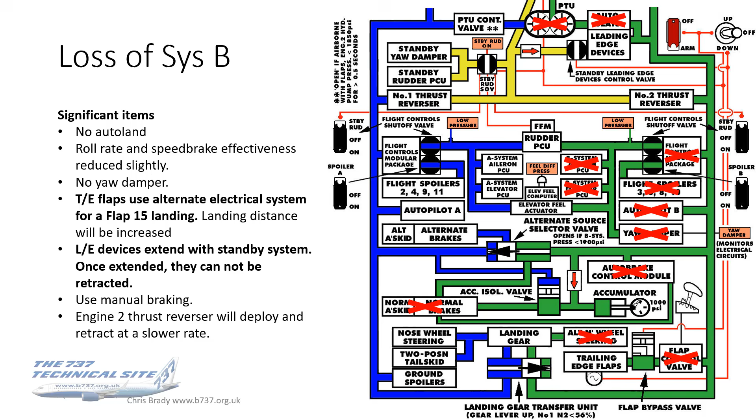It operates automatically to operate the autoslats and leading edge flaps and slats at the normal rate, if system B engine driven pump pressure is lost. The criteria for most aircraft is with the flaps anywhere between 1 and 10, but on some aircraft, the SFP short field performance ones, if the flaps are not up - because on those aircraft you can take off with flaps up to 25, and you're airborne.

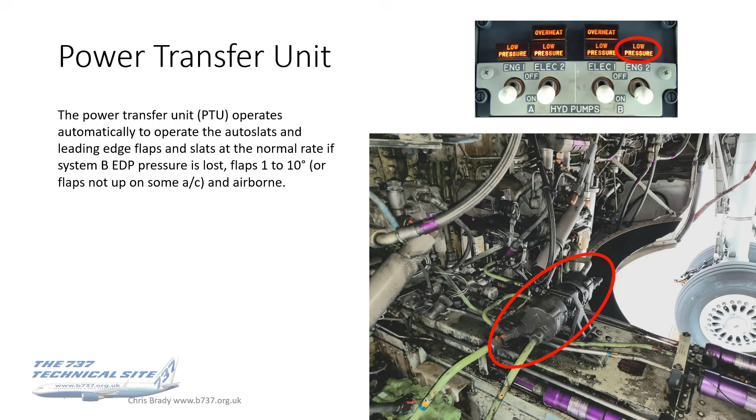So you can see on the PTU here, if I just label it up for you, it's a hydraulic motor which is driven by system A hydraulic pressure. The motor is on this side of the picture, and you've got your hydraulic A lines going flow and return in and out of the motor, and that motor is on a common shaft to a hydraulic pump which powers the B system through it, with the pump on the other side. Again, you can just about see on the far side the B system flow and return lines from that.

One other detail to mention is that if the PTU should overheat, then the B system electric pump overheat light will illuminate. That's because the PTU fluid is returned through the B system overheat module and case drain filter.

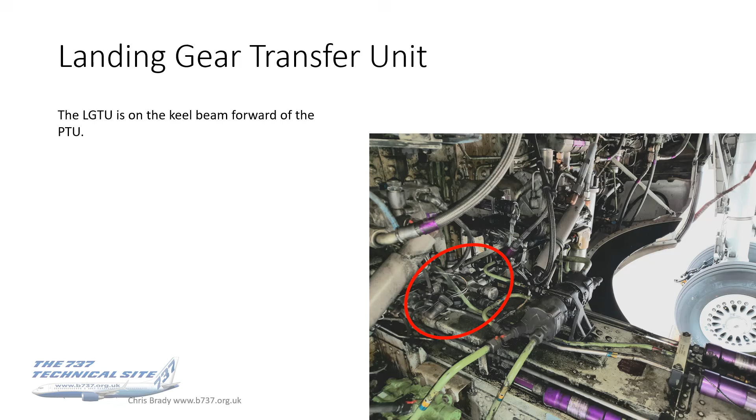So yeah, the other component is the landing gear transfer unit, and this is on the keel beam ahead of, or forward of, the PTU. You can see I've marked it there in the red circle. I'll just zoom in on that now, give you a close-up of it. There it is. Now this is similar but different to the PTU, but working in the other sense.

So the LGTU allows system B to retract the landing gear if engine 1 falls below 50% N2 on the NGs or 56% N2 on the classics - in other words, if that engine fails. Without the LGTU, gear retraction would be very much slower, because you don't have the engine driven pump, you've only got the electric pump, and that would be inordinately slow, and that would compromise your engine out performance.

So this is to retract the gear after takeoff. That's what it's for. If you lose engine 1 on takeoff, you can still retract the gear at the normal rate. That's what this is doing for you.

Now the LGTU logic, coming from the N2 gauge of engine 1, that's the reason dispatch is not permissible on the classics with the engine 1 N2 tacho U/S. There's actually no alleviation for the NG and the Max, so both tachos have to be working. But on the classics, you could dispatch with the engine 2 N2 tacho U/S, but not engine 1, and this was why. It was a pain - I only ever had to do it once, and there were a lot of issues, for instance with engine starting and start cutout, but I digress.

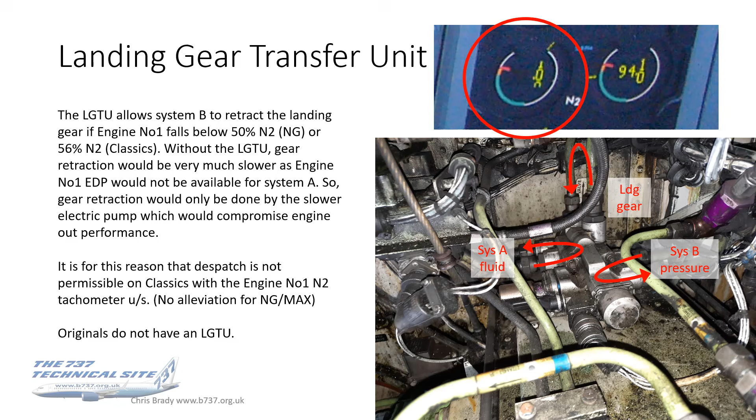The original series don't have an LGTU.

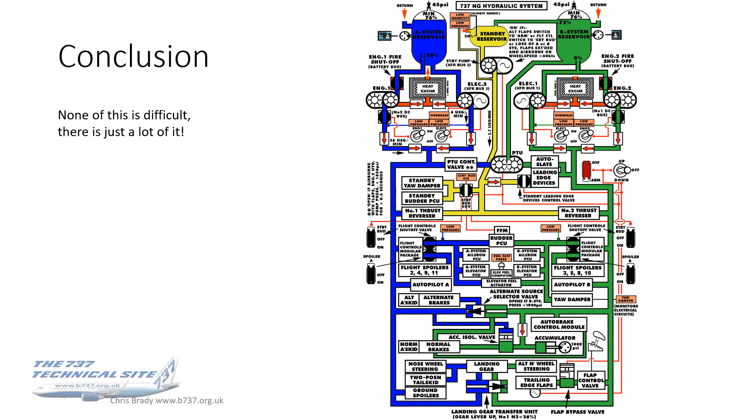So, to conclude, hydraulics - it isn't actually that difficult. The schematic looks horrendous, but that's only because there's a lot of it. It's very simple when you break it down into its component parts. Take a bit of time, study the schematics, either this one or the one in your FCOMs or any third-party ones - as I say, they all work the same. But once you understand the flow of it, it really is quite straightforward.